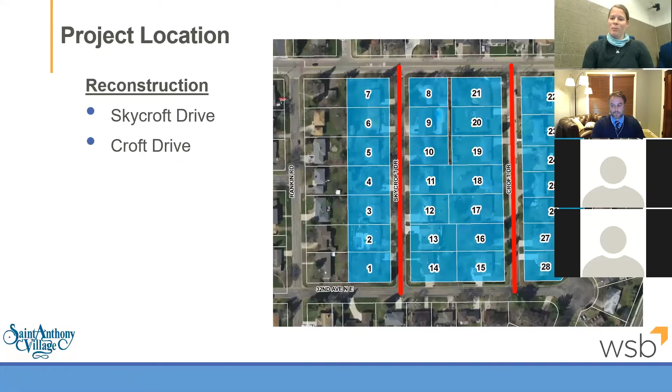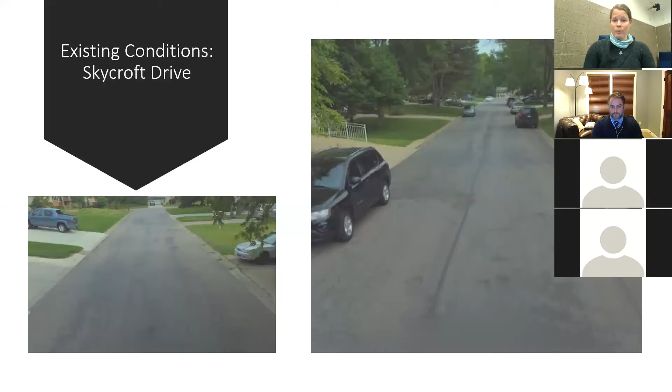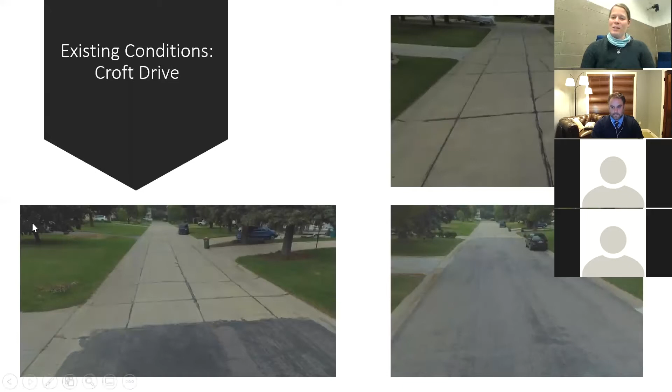And then for folks on Croft Drive, you guys are also aware, a portion of the road is paved and has received a chip seal in the past as well. The pavement is also experiencing the same distresses. The other thing is with these reconstruction projects, we do try and pinpoint some of those previous concrete roadways and reconstruct those to meet more of our bituminous roadway standard. So I know a lot of you are familiar with the da-dun that you hear as you drive down the roadway. So with these improvements, we give you a nice clean ride down the road.

So for the proposed improvements, we do include replacing the existing sanitary sewer system. So with last year's project on 32nd Avenue, we did replace the sanitary on that roadway. We also stubbed sanitary sewer up both Croft Drive and Skycroft Drive in preparation for these improvements. Since we've paved that roadway, this will give us the opportunity to upgrade that sanitary sewer without disrupting our newly reconstructed road.

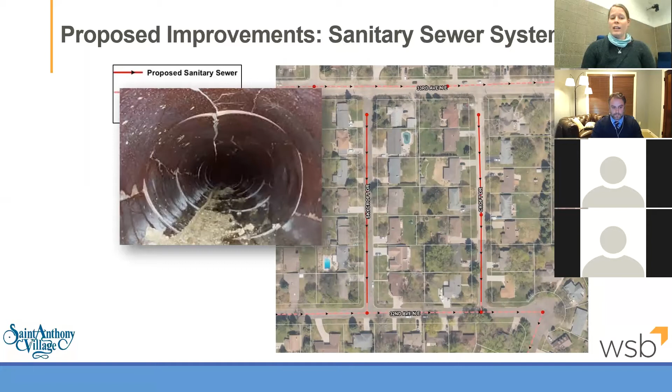The reason we do replace the sanitary sewer out there is with age, the existing system does consist of a vitrified clay pipe. Many of you know that clay doesn't usually stand the test of time real well. So whether it's kind of a compaction issue or any sort of cracking, it just gets worse and worse over time. Typically the main culprit with the cracking is tree roots. So tree roots like to get wherever they can find water. So if you do get a crack in that pipe, those roots will start to grow into that pipe.

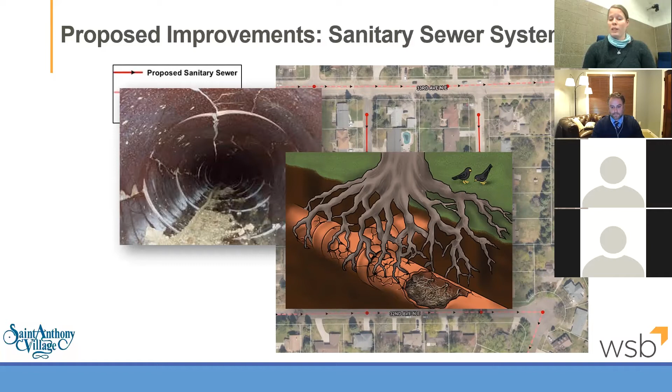And with this project, we will replace that. We'll put in a plastic pipe, which doesn't crack as easily, and second, you won't get those leaks with the trees or anything else infiltrating into that system. So with the project, we do replace everything within the roadway, which is the main. We also replace the services up to the property line. So what we call the utility side would be between your property line and where the main is within the roadway. And then there's also the homeowner side.

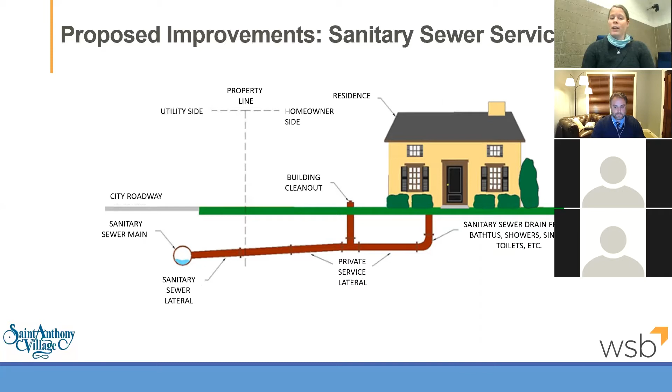So one thing we do with these projects as well is we actually televise your individual sanitary sewer service, and we'll televise that fully from the main to your home. And once we receive that information, we'll make that available to you. So what we'll do is we'll actually give you a recommendation as far as what we think needs to be done with your service. It could be anywhere from a cracked or broken pipe, potentially sagging where there's water being held in your service, roots infiltrating into your service, or just if you have a couple of cracks and now the groundwater is getting in there, we'll certainly give you a recommendation as to the type of repair we think is necessary.

Other times your service may be just fine between the right of way and your home, but we do like to make that information available to you. We will also make that televising tape available to you as well. So once we finish that during final design, a letter will be mailed out to everyone, and you'll be able to download those tapes as well as the recommendations we have for your service.

Now with those improvements, you aren't necessarily required to complete those improvements in your personal service. However, if you do choose to, we will make contractor information available, so you would have some folks that you could contact and get quotes from. And new to St. Anthony within the last year is if you do choose to make those repairs to your sanitary sewer service, you can include those on your assessment. That way, instead of paying that larger upfront cost to have those repairs done, it's almost like a payment plan with a small interest rate over the course of your assessment.

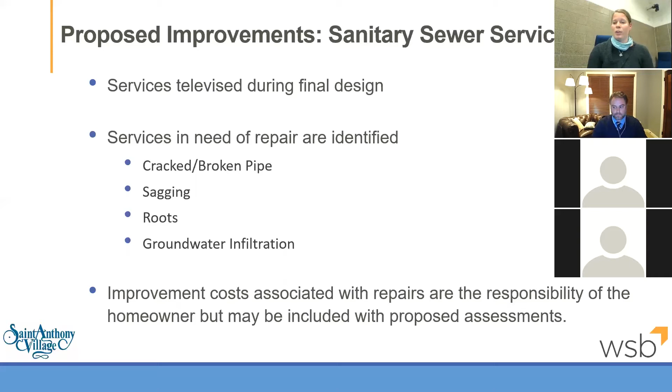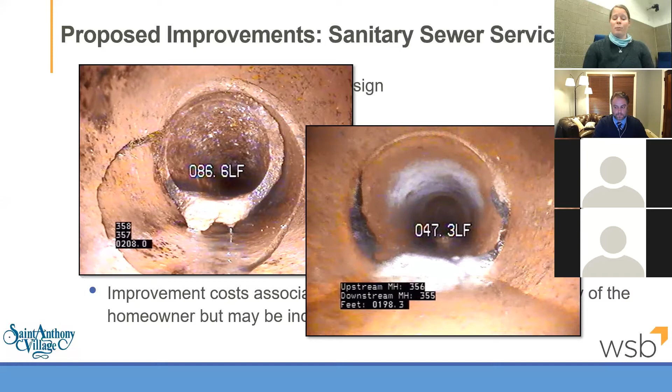So when we review these televising tapes, this is kind of what you'll see once those tapes are available. It's pretty common to see this clay pipe crack like that. And you can see some of the roots coming in there on the side. That'll just continue to get worse and worse over time. Other issues, you can see there's some infiltration coming in at the joints here. And also sag, you can see that there's some water sitting in there as well because the pipe has actually settled over time. So these are things that we'll bring to your attention that you can choose to have improvements completed if you'd like.

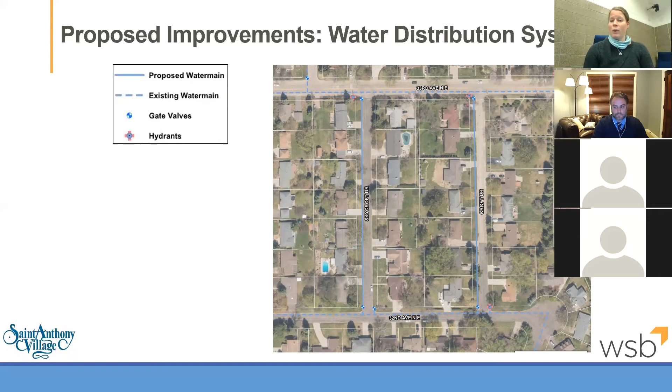So then the water distribution system, it's also the time to upgrade our system. It is an existing 6-inch cast iron pipe out there. It's very prone to corrosion. So since we're out there replacing the sanitary, we do like to upsize the water main to be an 8-inch ductile iron pipe. And the ductile iron is rated to last far longer, less prone to corrosion, and less prone to water main breaks.

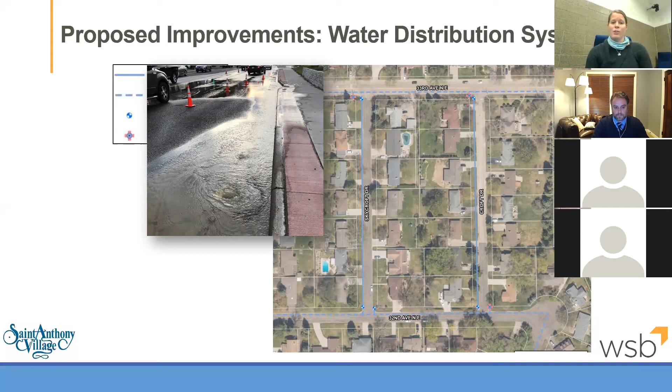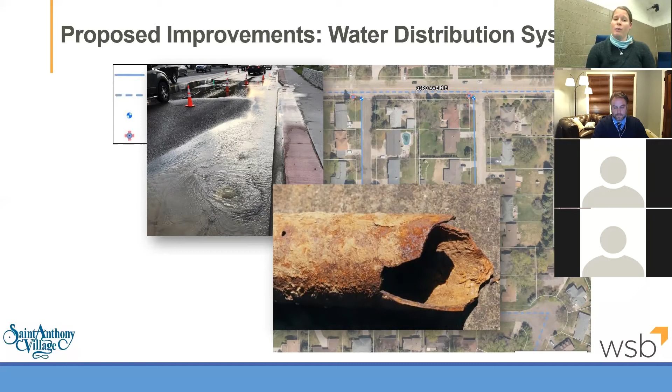A lot of these areas have high numbers of breaks that Public Works has been out there for in the past. So with replacing this main, you'll see less and less of those issues as we continue with these reconstruction projects. And this is just an example of that cast iron pipe over time. It's just very, very prone to corrosion. And when we replace the water main, we will also replace those services up to the curb stop within your property. So everything within the road right-of-way will be replaced.

Surface water drainage. I know a number of you know there actually is not any storm sewer out there along the roadway. So with last year's 2020 project on 32nd Avenue, we did install a few catch basins right at the intersection with Skycroft and Croft, and we've sized those manholes or drainage structures appropriately to accommodate the new pipe that we'll be installing with this year's project. So we'll be spacing those catch basins appropriately to help get that water off the road and into the pipe so it's not just free flowing from 33rd all the way to 32nd Avenue.

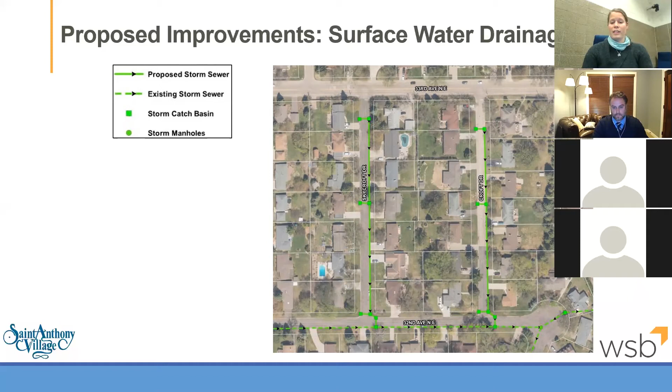So with our street reconstruction, we'll take out the entire road section, including the curb. We'll also subcut the roadway to allow for a class 5 section and also a sand section. That'll help beef up that road so that you don't see that alligator cracking we had talked about, and this will address those subgrade issues. In addition, we do install a drain tile under that sand section, and that helps to keep additional water out of the road as well.

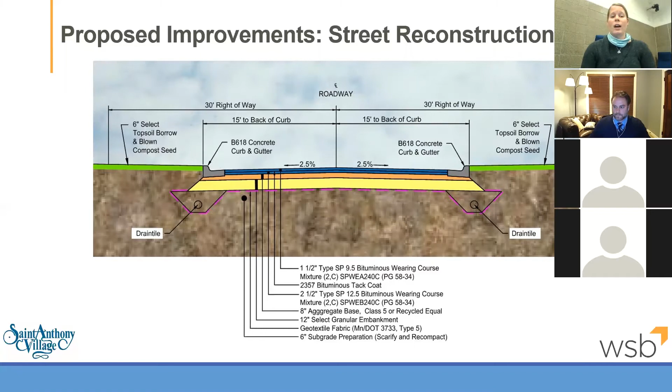So just a couple of examples of what you can expect. So this photo, they've done the utility work, and now this is the actual sand section. So they're out there grading that. Next, you would see another section, which would be the class 5, which would be followed by the curb and then paving of the roadway.

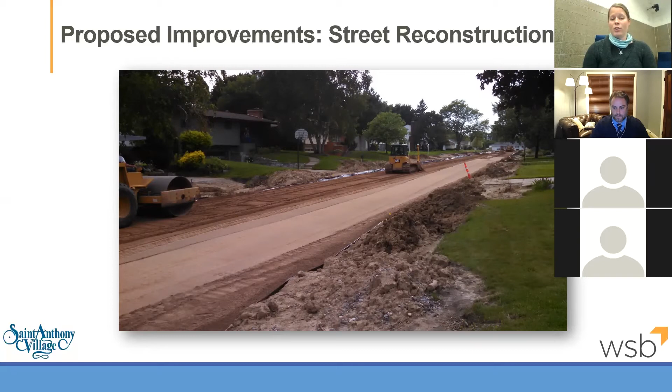So we try and keep our construction limits as restrictive as possible, but you can see in some areas, we do have to go a little further out just to get those services replaced all the way to the right of way. And then this is just an example of a typical street that we've completed.

With these projects, we do put the first layer of bituminous paving down in 2021. And then actually, because we live in Minnesota, we like to wait for a freeze-thaw cycle so that the utilities that we installed deep under the roadway have a chance to, if we didn't get adequate compaction or if there's some other issues under there, we get a year to kind of move around and make sure we're not going to damage the roadway before we do our final paving.

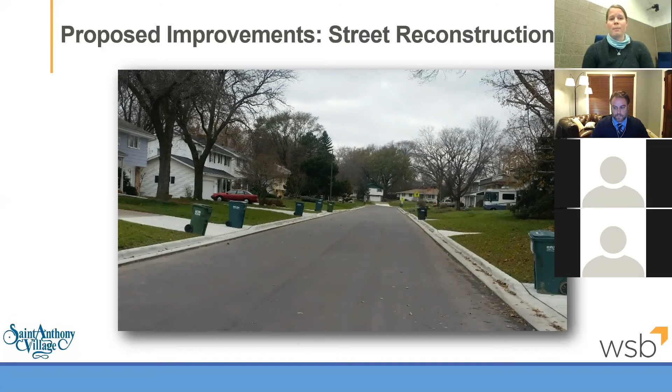If you do have concerns with a tree on your property that may be near your sanitary or water service, there are certainly options we can explore to maybe avoid impacts to those trees, but we will make that information available. Turf and driveway restoration.

So if you have a concrete or a bituminous driveway now, you will be getting a concrete or bituminous driveway after construction. When we install the curb, what also we need to do is install a 5-foot concrete apron from the curb 5 feet up to your driveway. And that allows us to provide drainage to your driveway. And it just helps keep the water off your driveway. So that is a city standard, and we install that in all our driveways. Beyond that 5 feet, again, if you have concrete now or bituminous now, that's the patch we'll be putting in.

And as far as turf goes, once we get through the project closer to that September timeframe, you will see them go out there. We do restore our boulevard areas in the form of seed versus sod. We've just found over the years that tie-in from where we have our excavations, our construction, to your existing yard, just in the year following, just looks so much nicer with the seed, and it tends to take a lot better as well for a nice lush yard.

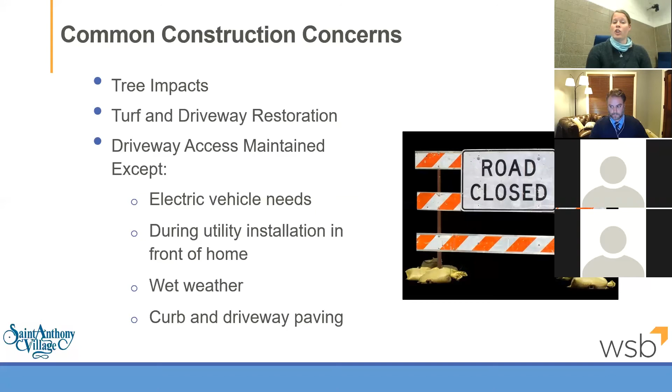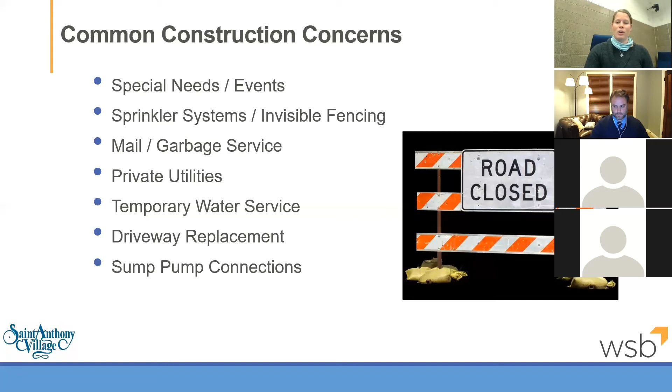Sump pump connections: again, we will be installing those drain tile connections out there, so you guys will have an opportunity to tie into those versus sending them into your utility sinks or anything like that, which is actually not allowed. So if you have a sump pump and you're interested in making that connection into our storm sewer system, please contact me and we can certainly do that.

So our assessment policy, which was actually just recently amended here in 2020: the city does assess up to a 30-foot wide, 10-ton design roadway.

In the past, we have done our assessments based on a front foot basis, and we've actually changed that to a per unit basis. So the percentage, the 35% for residential, has remained the same. But what we do it based on: if you're an interior lot, which is the majority of the folks on the road, you'll be assessed for 1 unit. If you're a corner lot, you'll be assessed a half a unit for each roadway. So for the few folks that are actually on 32nd and either Croft or Skycroft, you probably saw a half a unit for this year's project, and then you'll see a half a unit for the 2021 project.

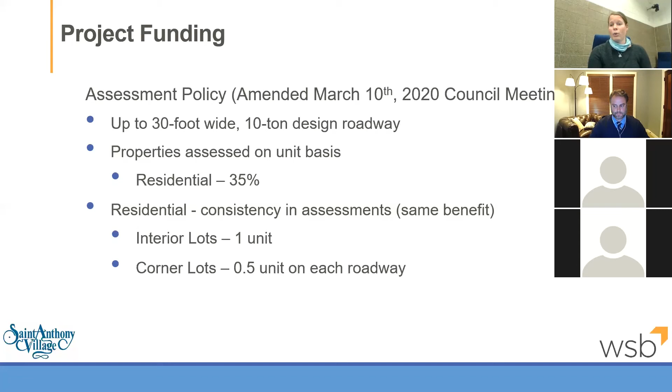As far as the improvement cost goes, we do assess for the street, the storm sewer, and actually the water main. And the only portion of the water main that we assess for would be just for the actual service replacement at your property, which includes the curb stop and the connection. So that's just a pretty small assessment, but that is also included.

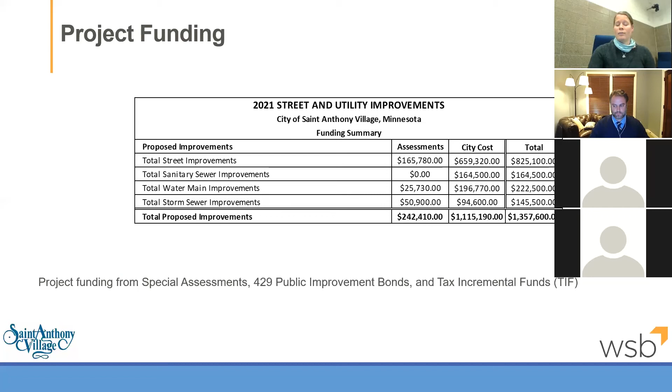And we do follow the Chapter 429 public improvement bonds process, which does include holding a number of meetings, discussing those assessment amounts with folks, and then following through with that state statute. So the process follows, again, the 429 process. If you do have an objection, the appeal must be presented in writing prior to the hearing, and that's for the assessment hearing. So we'll have both the public improvement hearing that was shortly after the feasibility was accepted, and then the assessment hearing is typically held in March.

So the notice of the appeal must be filed within 30 days of adoption of the assessments, and those assessments are typically adopted in the October, November timeline. The interest rate is set at the time of the assessment certification, which is typically just 2% above the current bonding rate. So the folks that are proposed to be assessed with this reconstruction project are identified here.

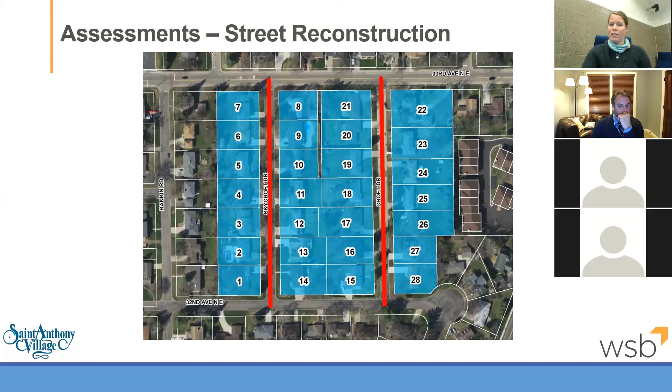So the assessments, because we're doing utility and street improvements, may be paid over a 15-year period. To pay off the full assessment to avoid any interest, that date would be November 30th of 2021. You also can do a partial payment anytime after that, but it does need to be received by November 1st to avoid additional interest beyond that.

So how you can actually opt in to have that assessment included on your property taxes versus paying it: the best part is you don't have to do anything. If you choose to not pay that by November 30th, that will automatically roll over onto your property taxes. And that interest rate is determined at the time of the sale of the bond, and that's going to be 2% over those true interest costs, which in the past have been anywhere in that 4 to 5% range.

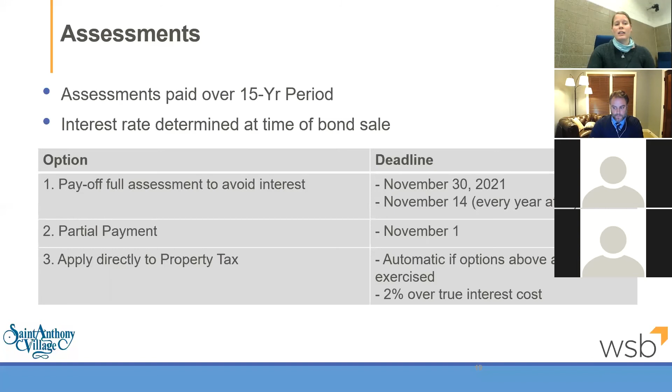Project schedule. The council did authorize the preparation of the feasibility study in May. They accepted that report in August. This is our first public informational meeting. At the end you will see my contact information. We'd love to meet with you guys and do some on-site meetings. If you have concerns about landscaping, I know there's a property out there with a rain garden, or any specialty driveways, we'd love to be able to meet out there and discuss your concerns.

So what we're hoping is to have those meetings over October and November. If we're lucky, maybe some of the snow will go away so we can see what's going on out there, but I'd certainly love for you to contact me and we can set something up to meet with you individually. We plan on the council approving plans and authorizing that we can go out for bidding with contractors in December. The intent is to open bids and compute those assessments in January.

We will hold a second public informational meeting in February where we'll present that information and what those anticipated assessments are going to be prior to the public hearing and the award of the contract. So you'll have an opportunity to know what those costs are prior to the formal meeting with the City Council. Next, you'll see the award of the sale of the bonds.

Typically, they'll begin construction in that May-June timeline. We found more, they've been starting closer and closer to June. St. Anthony has a lot of clayey soils, and once those get wet in the spring, it's really hard to come back from that. So we like to say more just that late spring, early summer as the weather allows.